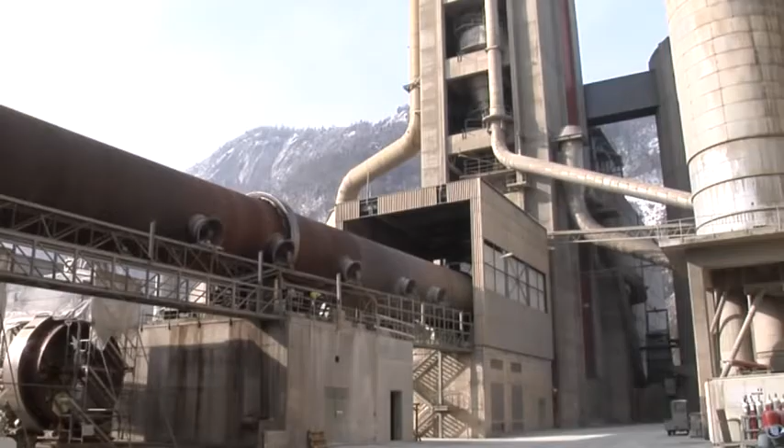Holcim cement plant Untervaz is situated in the east of Switzerland. Since 1957, cement has been produced here. Later, in 1972, the plant was equipped with a satellite cooler. In the 60s, the satellite cooler became popular due to its simple design. With the introduction of the pre-calciner, they became old-fashioned.

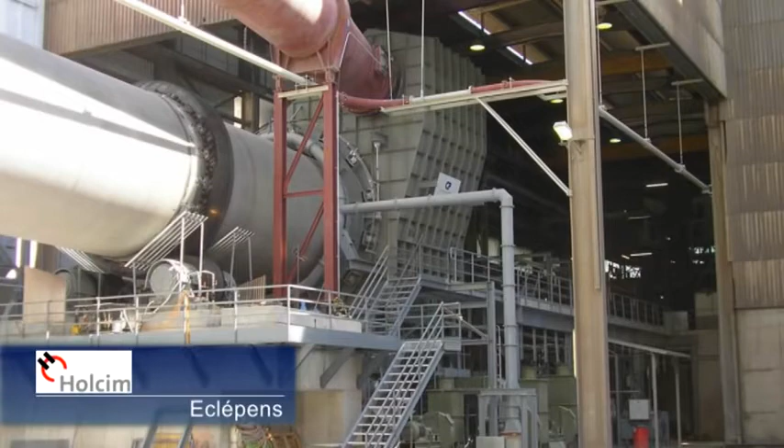Satellite coolers are no match for a modern-day ETA cooler with its low maintenance cost and the excellent heat recuperation. The good experience with the ETA cooler in Eclépens, where Claudius Peters replaced a satellite cooler in only 36 days, led Holcim to their decision to carry out the same upgrade for Untervaz.

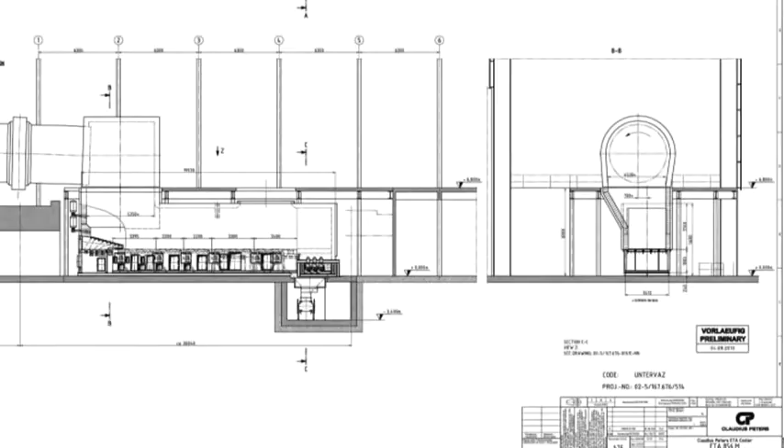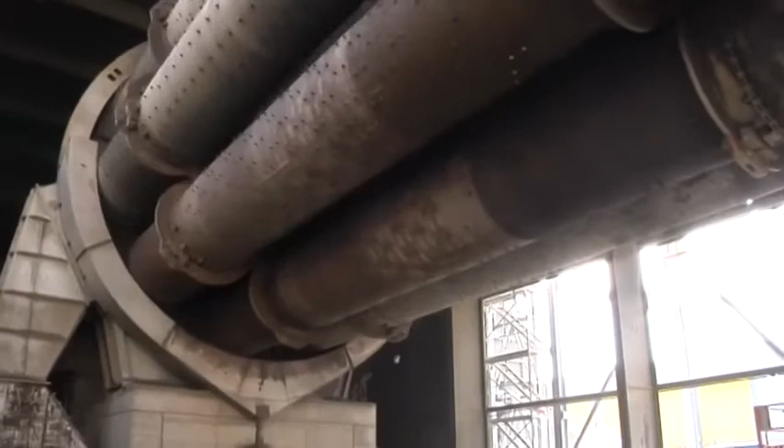The ETA cooler had to fit between the kiln pier and the clinker conveyor. This gave a special challenge to the cooler design. Claudius Peters offered a 5-lane cooler with an internal width of 3 meters. During the kiln stop of 2011, the foundations were prepared.

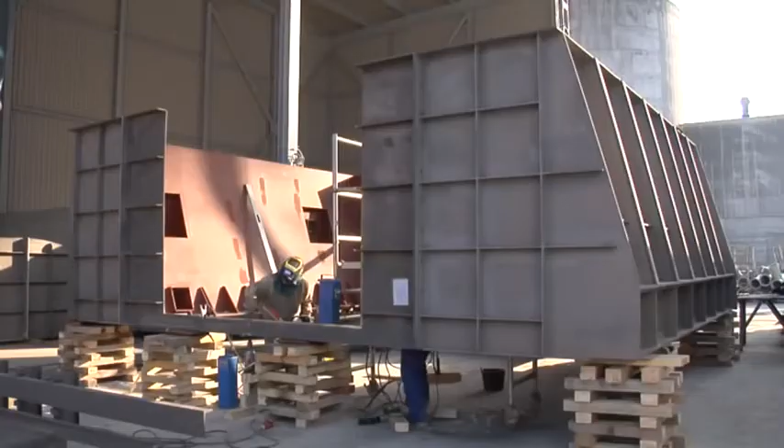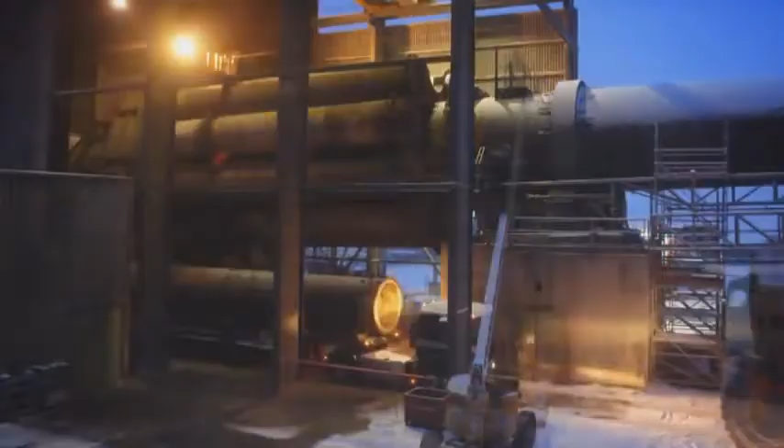In the first weeks of February 2012, the kiln hood was welded together in preparation for the major kiln stop, the replacement of the satellite cooler with a state-of-the-art ETA cooler. February 13th. The satellite cooler is stopped for the final time. Now everything has to be planned in detail to ensure a quick turnaround, as every hour the kiln is not producing costs money.

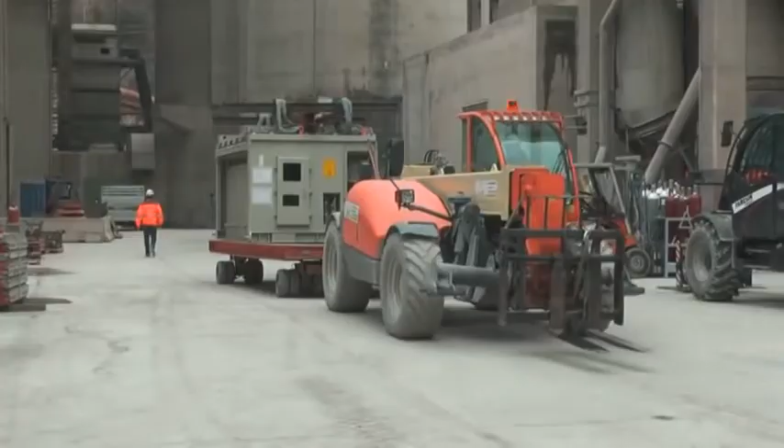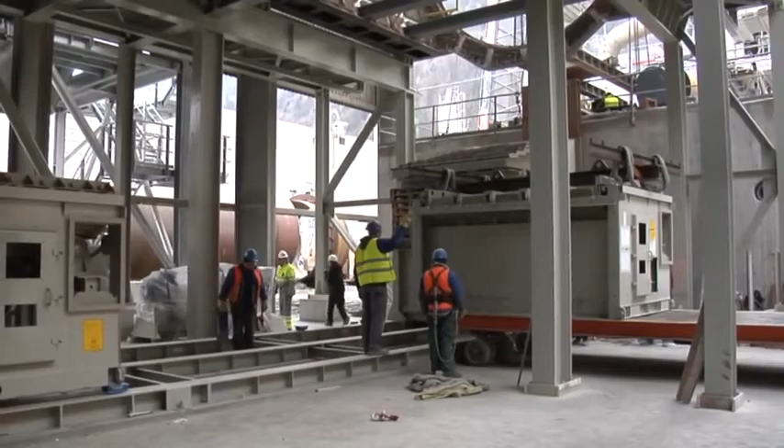The robust modules were completely pre-erected under workshop conditions. In just a few hours, the modules are placed on the foundation. The modules are lifted with the in-house crane on heavy-duty rollers and can be easily moved.

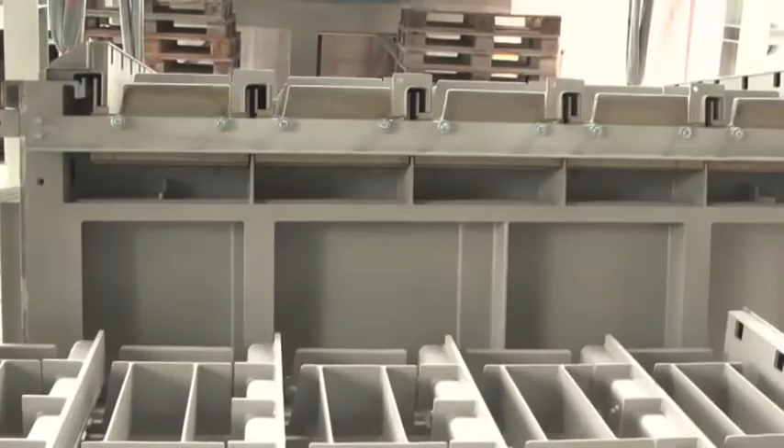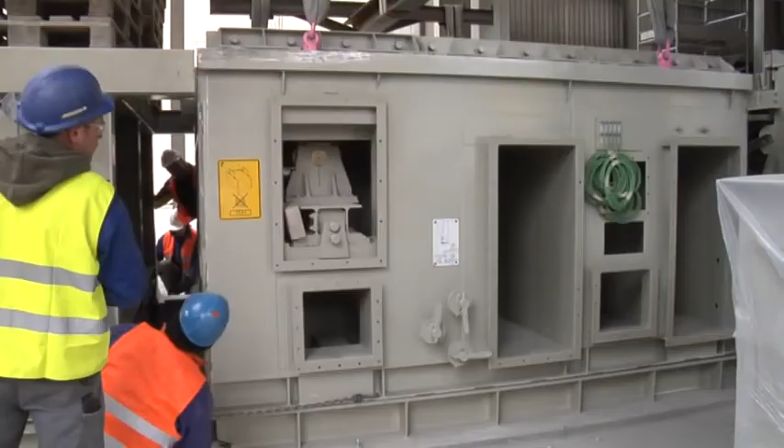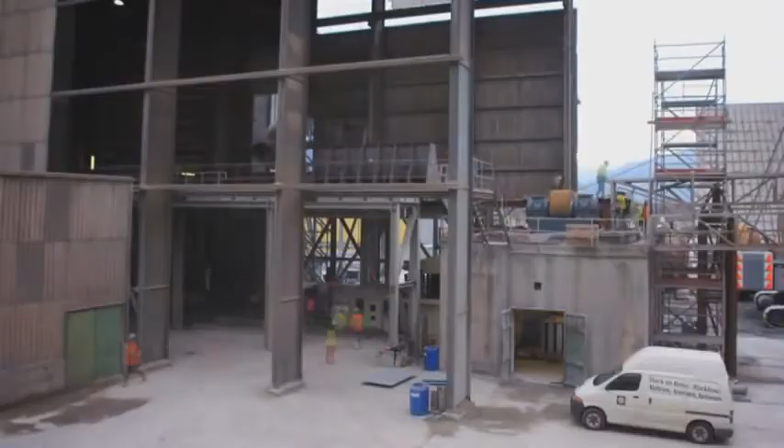Then the final positioning takes place and the HE module aeration box is placed. The modules are installed in only one shift. The kiln hood, complete with refractory, is lifted in 3 parts to its final position.

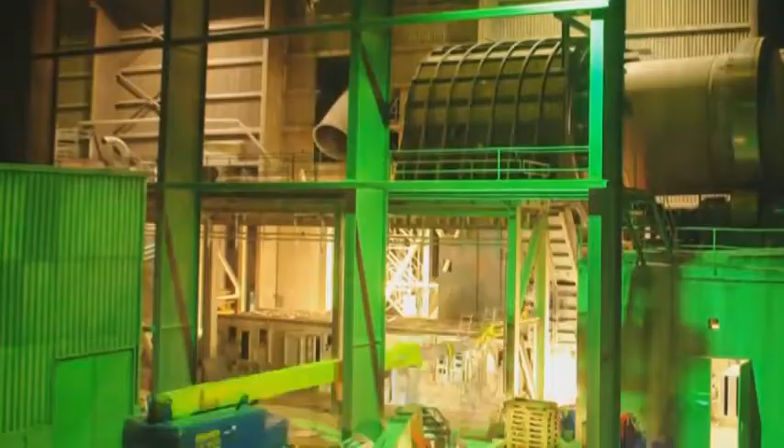When the modules are in place, the upper part, roller crusher and burning platform are put in position. As usual in such jobs, the finishing work takes the most time.

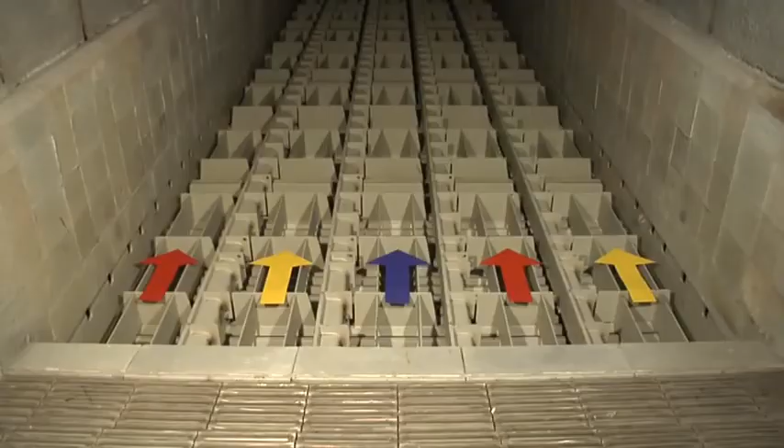During the cold commissioning, the movement of the aerated lanes is tested. The clinker on the lane that moves backward is held by the sidewall and the lanes beside it. This ensures a superb transport efficiency. At the end of the cooler, the clinker is pushed onto the roller crusher.

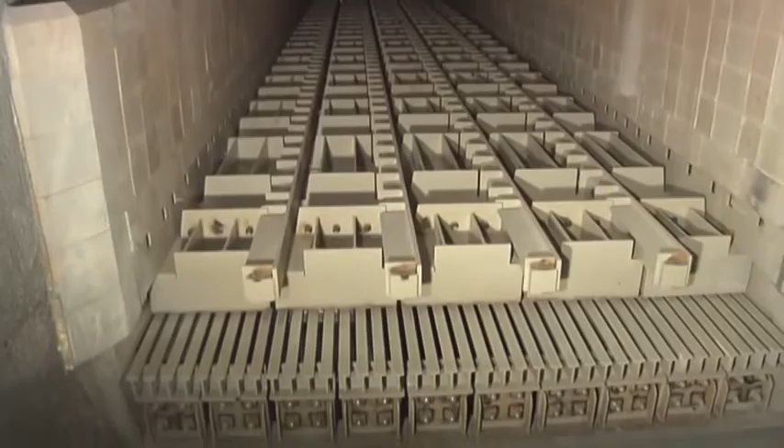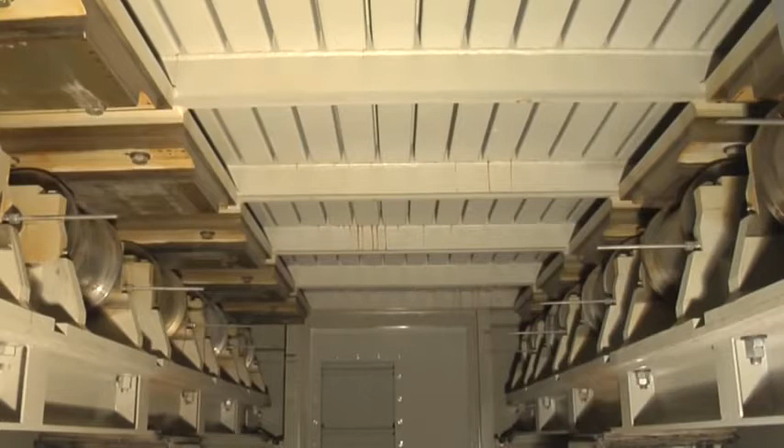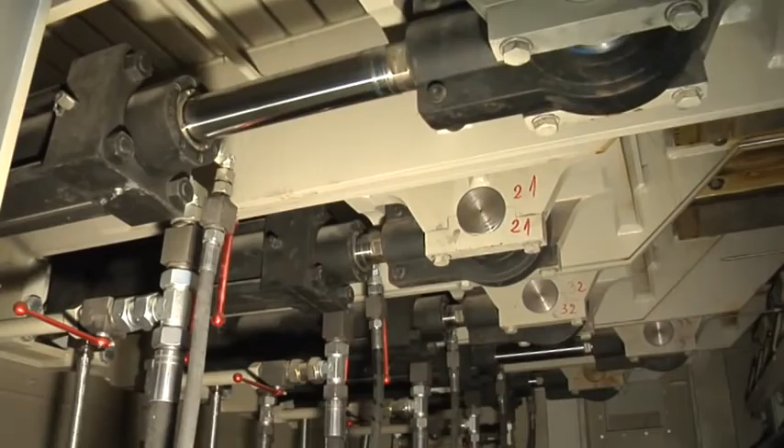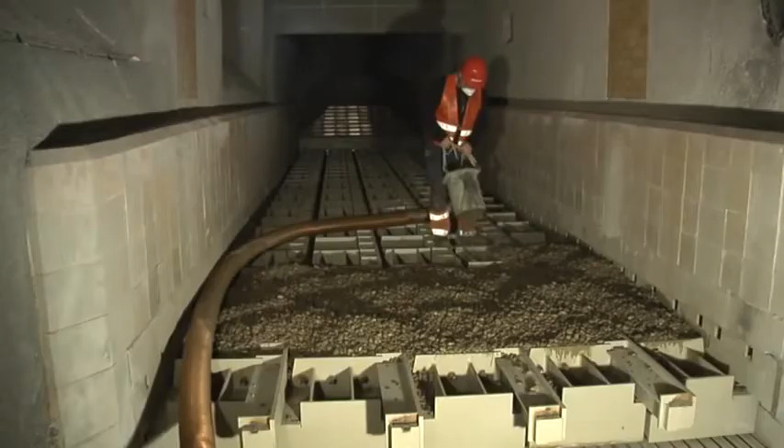The lanes are positioned on heavy-duty rollers. They are driven by hydraulic cylinders. Claudius Peters gives a 5-year guarantee on lanes and rollers. The lanes are filled with gravel. This protects the air inlet mushrooms from heat and wear. Then finally, after all the hard work, the kiln line is taken in operation and clinker is produced.

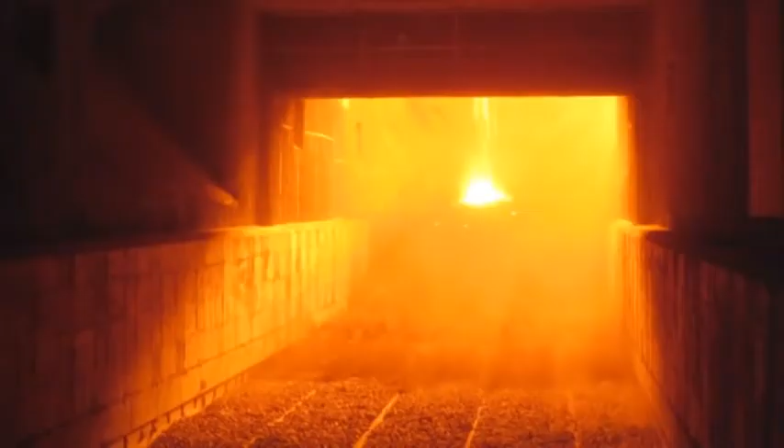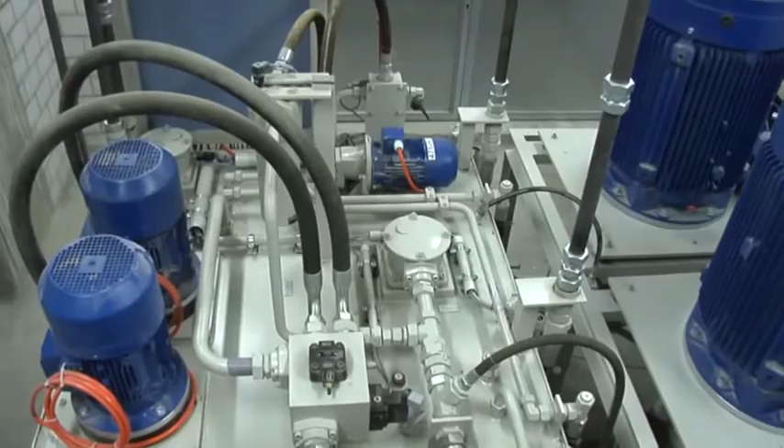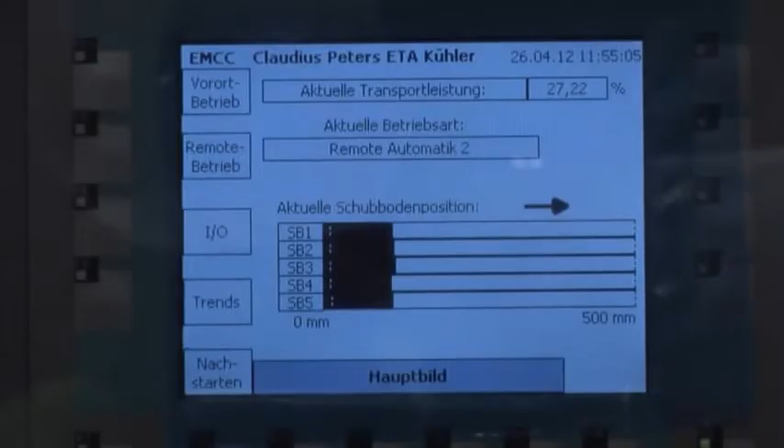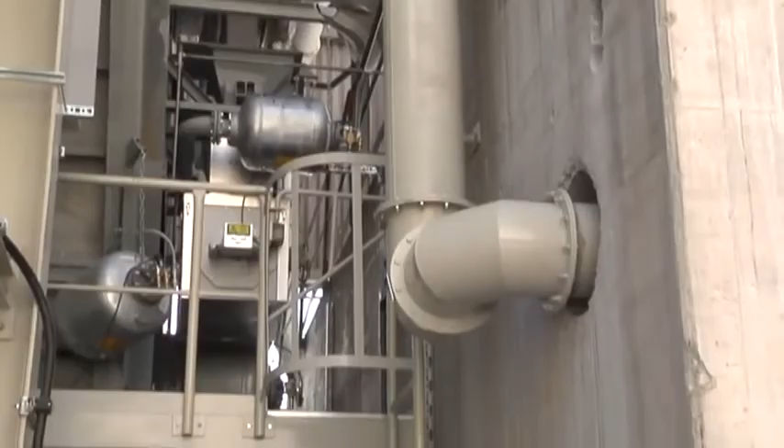The hydraulic aggregate is only 20 meters away from the cooler in a separate room. In the electrical room, located beside the hydraulic room, the local control cabinet is located. Here you can easily change the cooler parameters. The cooler upper part is equipped with air cannons to blast away buildups in the cooler inlet. On the left and right side of the cooler, the cooling air fans are located.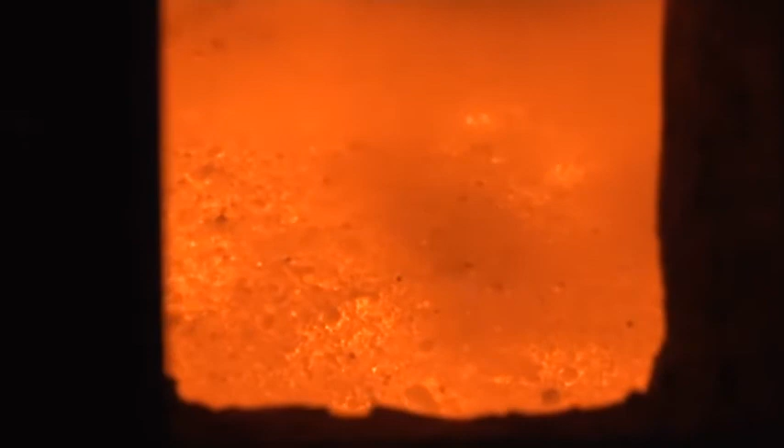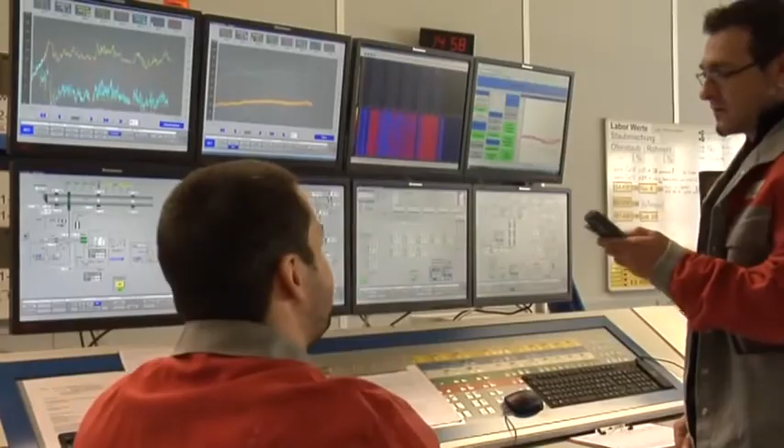The high clinker bed of the ETA cooler ensures an optimum heat exchange and therefore the highest recuperation air temperature. Oversized lumps are crushed by the roller crusher. The cold clinker is transported to the clinker storage. Quickly, the optimum setup for the cooler is found by Holcim operators. The lanes are well protected by the gravel, therefore they only reach a temperature of about 40 degrees Celsius.

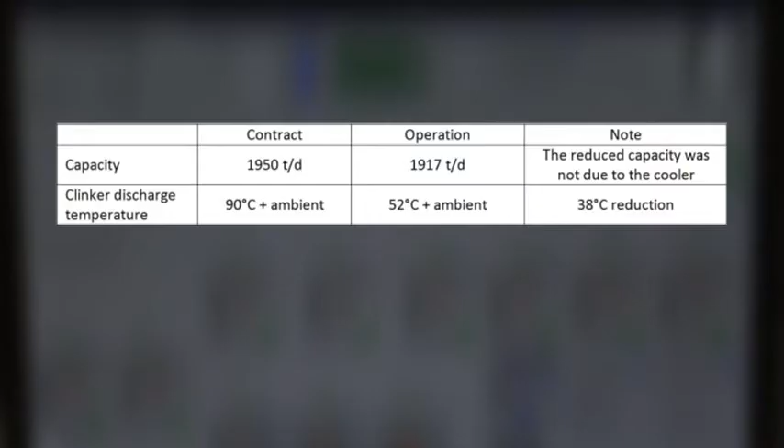During the operation tests, all guarantee values are clearly reached. The clinker discharge temperature is only 52 degrees Celsius above ambient. The cooler efficiency is 75.8%, well above the guaranteed value. The specific energy consumption is only 4.39 kilowatt-hours per ton. The specific air consumption is below 1.5 norm cubic meters per kilogram.

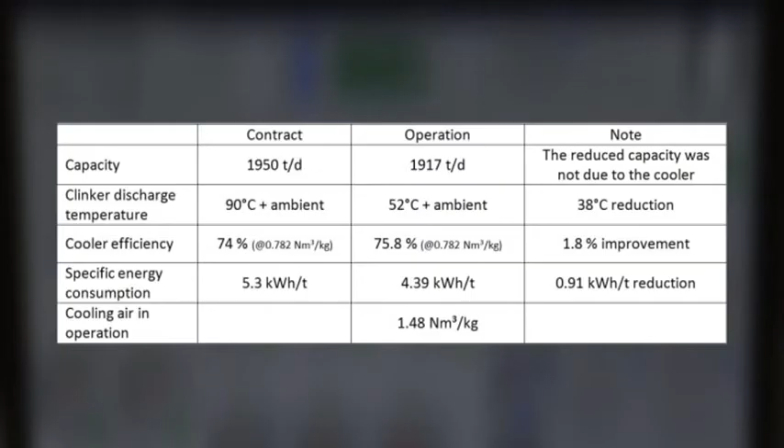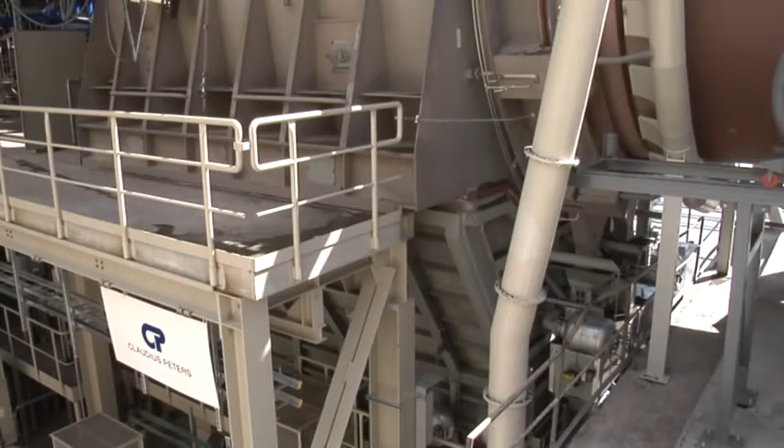On top of that, a reduction of 2 to 3 kilowatt-hours per ton on cement grinding could be marked due to the improved clinker quality. The ETA cooler of Untervaz has surpassed Holcim's expectations. The ETA cooler is extremely robust and with a guaranteed lifetime of 5 years on key parts, a carefree cooler service life is purchased. The performance figures are the best on the market. What Claudius Peters guaranteed was achieved and surpassed.